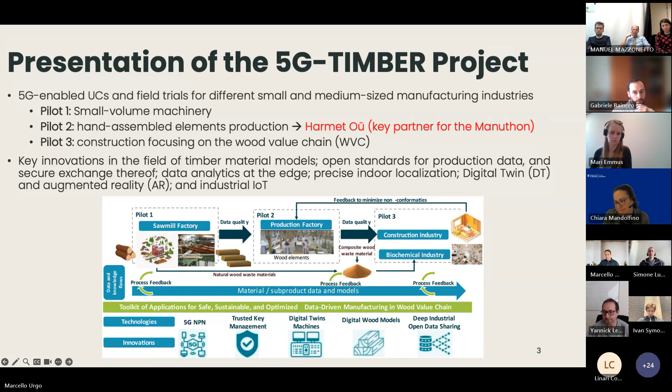Good day, everybody. My name is Mari, and I'm a Harmet project manager. Harmet produces timber-based modular buildings since 1997, and we offer complete solutions from design to production of the modules to the assembly of these modules on site.

But before I tell you a bit about Harmet, I will share a bit of insight. What is modular construction? As you know, traditionally in the construction industry, buildings are built on site. But in modular construction, the prefabricated modules are produced in a controlled factory environment, and these modules are then assembled on site. These modules have either metal, timber, or hybrid structure.

In our production, the first stage is the production of 2D elements, out of which these are put together into the 3D module, which you can see in the upper picture. The windows and doors are also installed in the factory.

During the same time when the modules are being produced, the site works are also being done. When the modules come from the factory, they're transported to the site, and on site these modules are assembled next to each other and on top of each other. After that, the connections between the modules are made, and additionally the HVAC and electrical systems are assembled. Then the building is ready.

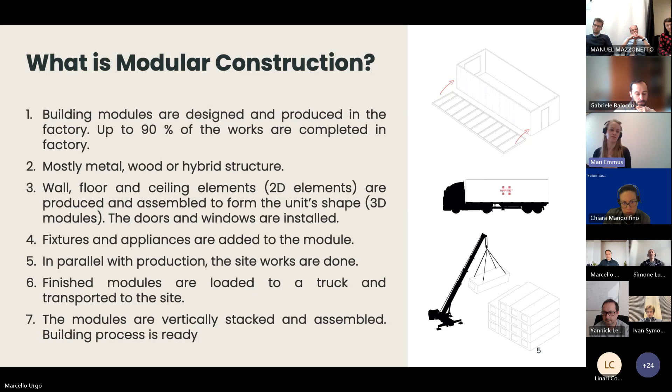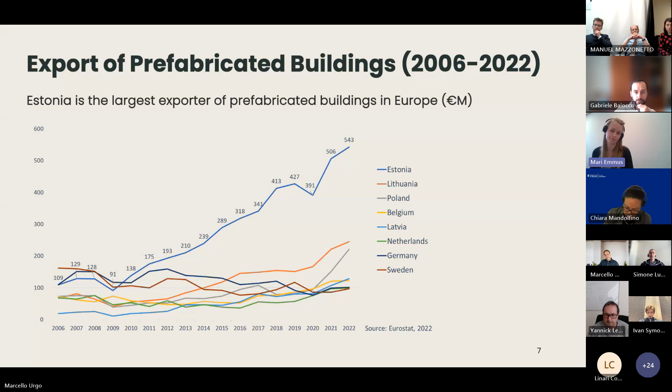What you perhaps do not know is that Estonia is the largest exporter of prefabricated buildings in the whole of Europe. Next slide, please. So a bit about Harmet.

We're the largest producer of modular timber buildings in Estonia. Our monthly production capacity is between 600 and 800 3D modules, depending on the product we are producing.

The first are the site huts, which are quite simple products used on construction sites. We are capable of producing around 800 of these modules per month.

The second group are the semi-permanent modules, which are used to assemble schools, kindergartens, offices, and accommodation for workers. The third group are the permanent buildings, which are, let's say, like regular buildings - apartment houses, student houses, and retirement homes.

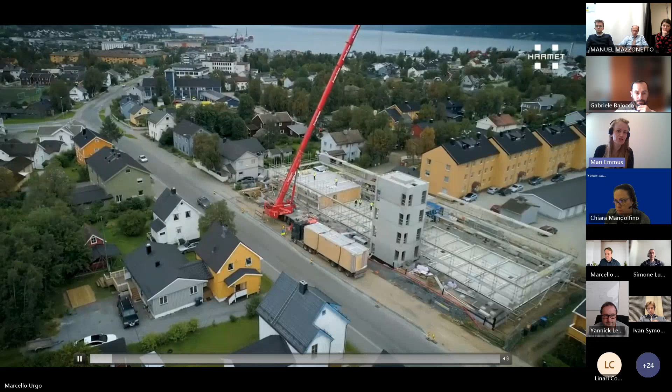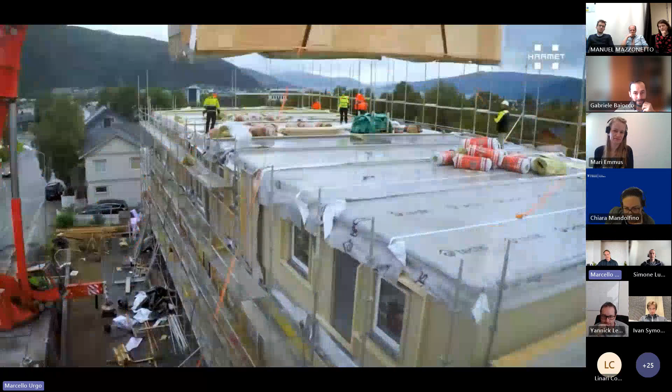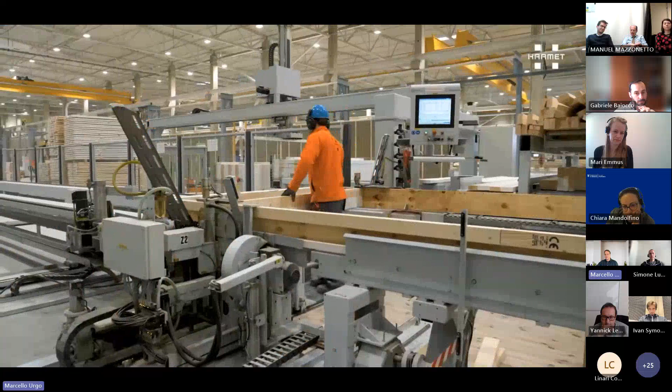Let me try. Building for your dreams. Harmet values your time by offering you the opportunity to plan and build faster and more efficiently than ever before. Harmet offers our clients complete solutions, from design to the assembly of our buildings. Our rapidly evolving company began producing prefabricated modular buildings in 1997.

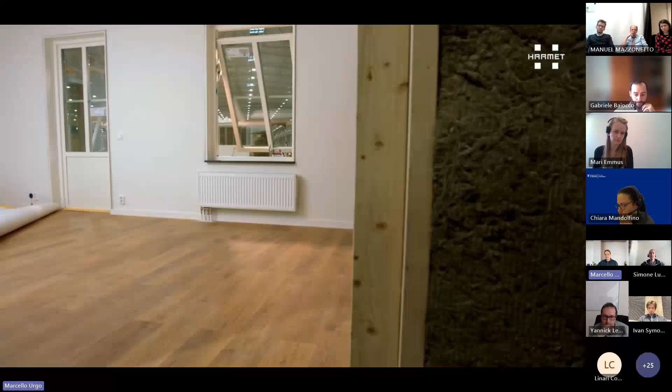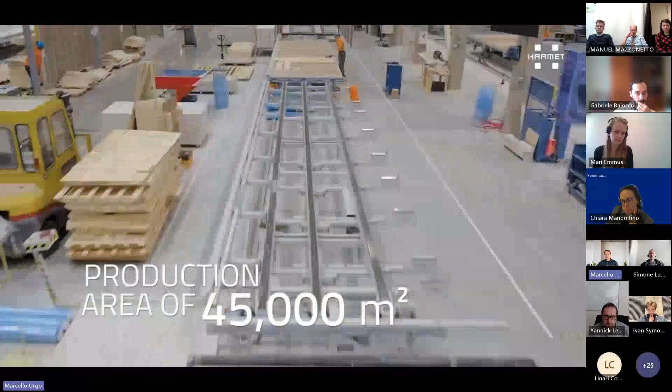Our product range includes various modular houses, building elements, and modular on-site facilities. With a team of over 600 personnel, Harmet operates in 4 factories with a total production area of 45,000 square meters. The total annual building capacity is approximately 200,000 square meters.

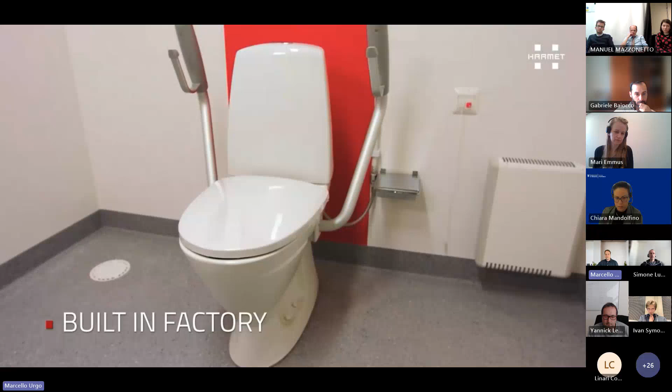We provide prefabricated modules. Around 90% of the entire building structure and interior is manufactured in our factory, which offers the most optimal and safest conditions for construction. Harmet's primary market is Scandinavia, and more than 95% of our production is sold to Scandinavian countries.

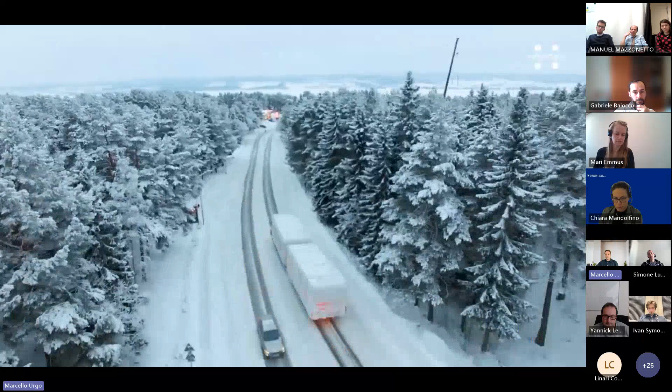Close to 70% of our production is delivered to the Swedish market, with our primary customers being Kramo and BoKlok, IKEA's and Skanska's joint venture. Harmet employs more than 25 engineers.

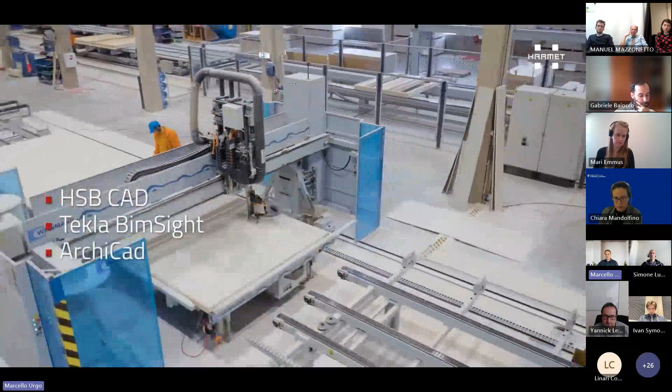We use BIM technology, available software including HSB CAD, Tekla BIMsight, ArchiCAD, MagiCAD, and AutoCAD architecture. We carry out building elements, technical drawings, water sewage, heating and ventilation system design, also electrical system design models, and project management of the design.

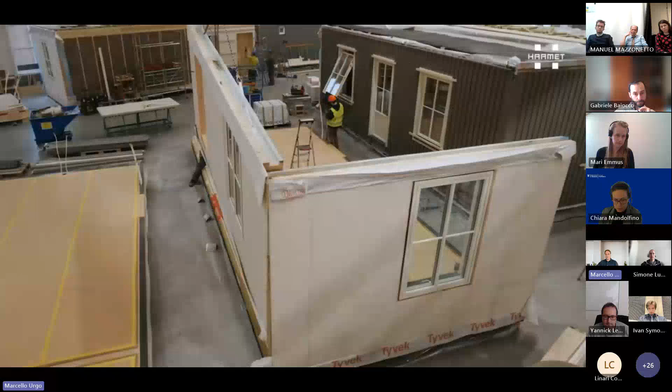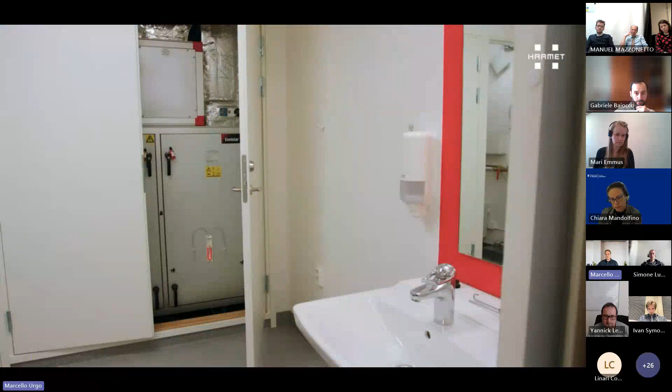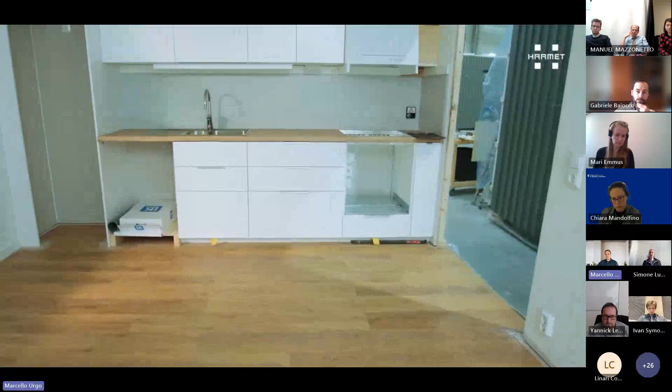Our products come with all doors and windows pre-installed, with all interior finishing and most of the exterior finishing already completed, with complete power, water and sewage systems, with all sanitary and bathroom appliances already fitted, with a pre-installed ventilation system, with pre-installed kitchen cabinets and appliances. We can also install all furnishings, and all modules undergo quality control before leaving the factory.

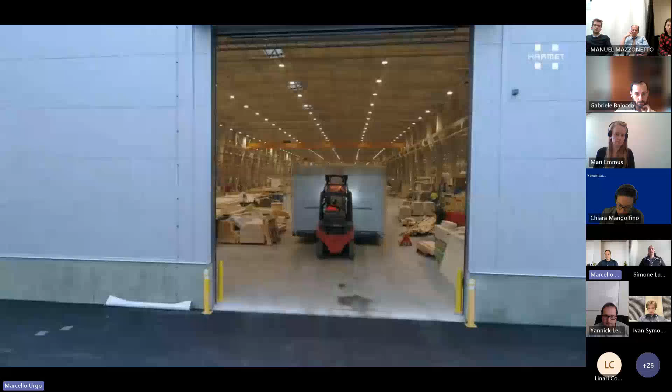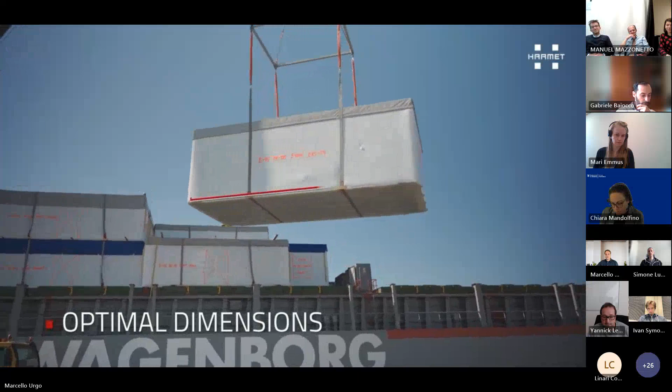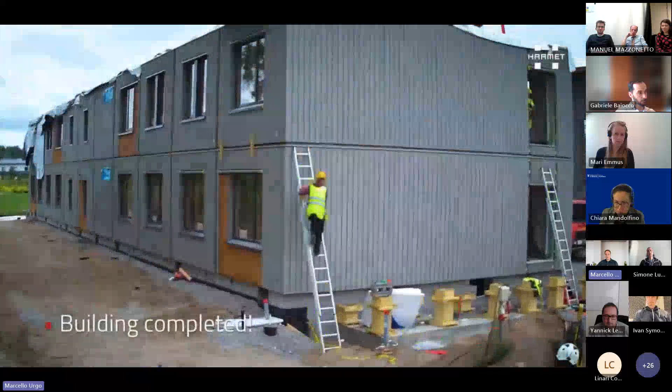Our products feature high-quality construction materials, which ensure a long service life and reduce future maintenance costs. Harmet's products come with up to a 5-year warranty.

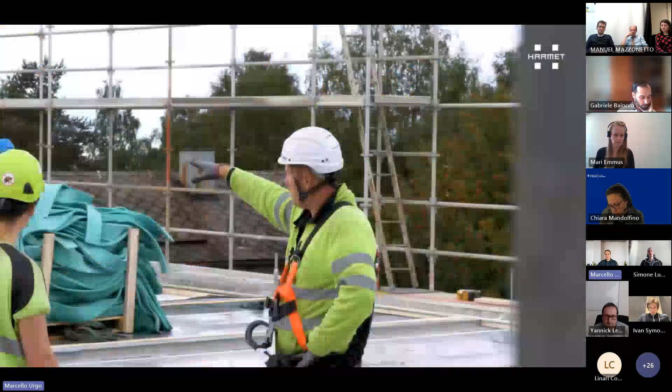In March 2010, Harmet acquired a Pan-European Quality Certificate, ETA 10/0030, allowing the design and assembly of wooden houses all over Europe.

Harmet is also environmentally active by planting numerous new trees every year, helping to renew and regenerate forest and woodland areas. In 2017, Harmet opened a brand new factory at Kumna, Estonia.

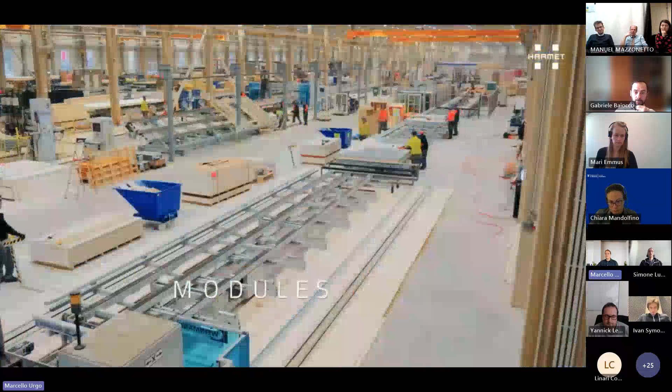With 23,000 square meters of production area, it will provide an output of 350 modules per month. Modern technology lowers production costs and raises volume levels, which is a great step towards satisfying our most demanding customers.

With Harmet's wide product range, from portable on-site facilities to modular building elements and modular houses, Harmet offers you the opportunity to plan and construct for your wildest dreams. In no time.

So, Mari, if you don't have anything to add, I will continue. No, thank you, Marcello. So, thank you. I will take the stage now. I'm presenting in English. Well, I'm Italian, so in case any question arises, both me and Simone, we can speak Italian, so we can support in any case. Thank you to the colleagues, and thank you, Mari, for your availability to be a use case for this challenge. I will briefly present the motivation and a description of the challenge we are presenting to you.

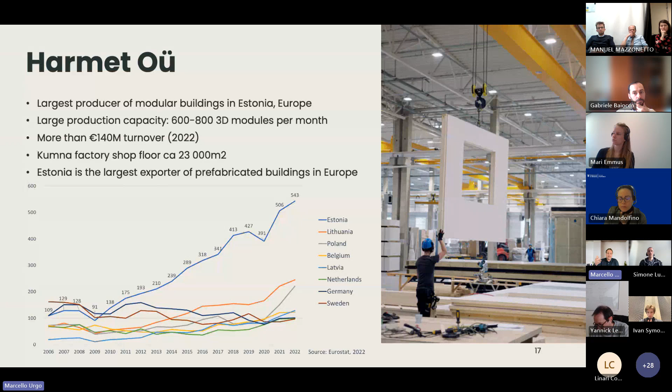This has a clear impact on the way those modules are produced and the factory that has to take care of this. The main industrial motivation we'll address here is that Harmet provides a wide range of products—many different kinds of modules used in different ways. There is a wide range of typologies, but they also allow customization, providing furniture, electrical and water installations, and specific configurations for the customer.

Each module could be different from the others, and this provides extreme complexity in the production system, and consequently risk for errors, because most activities are executed manually. Also, if you are producing different products in the factory that change from day to day, the logistics of material, people, and transporters moving inside the factory can be complicated, which is a possible source of dangerous situations on the shop floor, since you're handling heavy components in different places. This is a strong motivation to use digital technologies to support safety.

How can 5G and digital technologies in general help? There are two main directions we are pursuing. The first is bringing to the human operator the best information they need—instructions, drawings, data—so that on the shop floor, while assembling the product, they can access this information easily. Extended reality, or XR, is one of the technologies we're addressing in the project, since 5G enables this even more on shop floors.

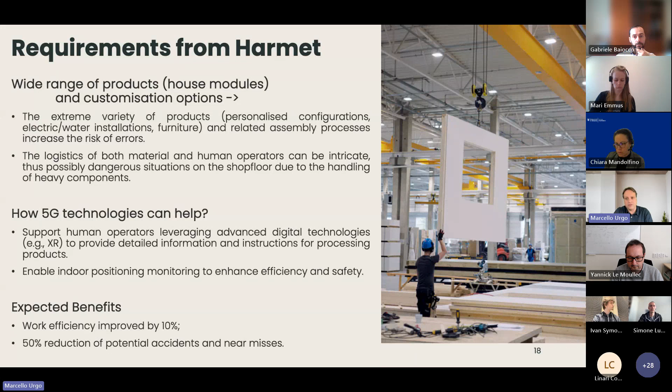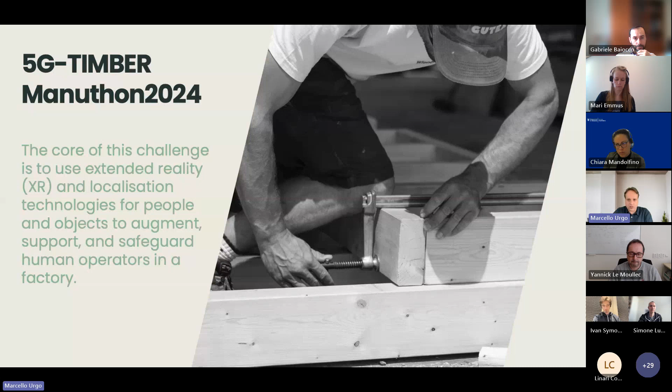So the core of the challenge is using extended reality to support people and check their position against dangerous situations in the factory, specifically the handling of materials. The idea is bridging the gap between the real factory and the digital factory that contains all the needed information and monitoring of what is happening, to enhance productivity and mitigate the associated risk.

You will take advantage of the technologies and tools we are developing in the project. You'll have an XR technology environment ready to use for prototyping, and you can also use technologies leveraging XR for precise localization of objects. So the core of the challenge is to use extended reality and localization technology, especially QR codes that can be seen by the XR devices, to identify objects and estimate distance. The idea is to support the human operator while they are assembling those modules.

The proposed solution is expected to bridge the gap between the digital and physical world, mitigate risks, and enhance productivity, demonstrating that it can increase productivity and reduce the risk of accidents. What we expect from you is a presentation and documentation of your proposed solution, and possibly a demonstration.

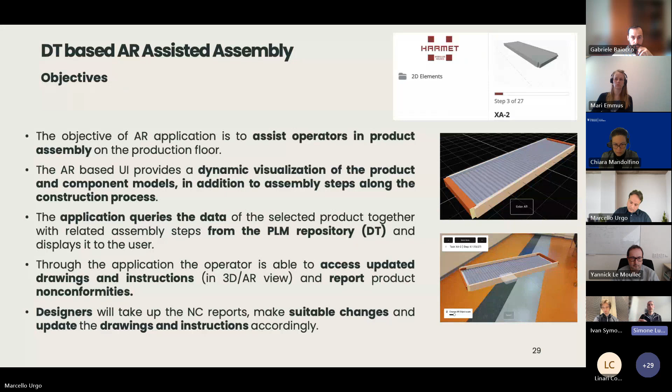So the non-conformities there, which can then be reported and fixed in the design phase and in the 3D models.

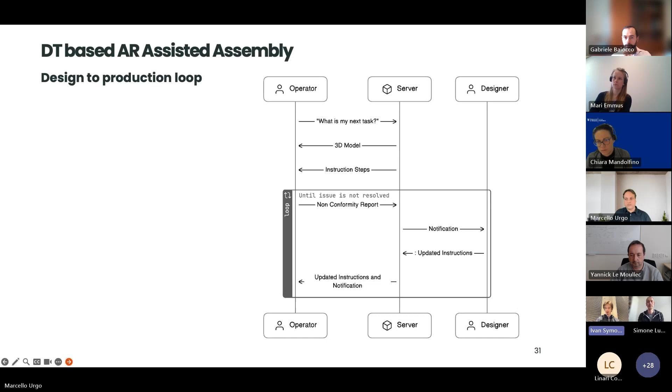So anytime the operator wants to know what would be his or her next steps, he or she can just enter the application, get the relevant step and 3D model, probably from the point where the operator has finished it. In case there are any issues, the person can pinpoint on the real or 3D object visualized in the app the problem, because it's very common that, for example, some model is of improper size or the instruction is not matching with reality. Then it would get a real-time notification to the designer, who will take appropriate steps and update the user with new instructions, new 3D models inside of their personal applications.

Essentially, it is hosting a website with some pages which are immersive, meaning that you can run the XR scene from there, navigate there with your tablet, then run XR mode, and walk around and see what is there. Multiple operators, regardless of the device manufacturer which they are using, whether it's a tablet or mobile phone, can connect to the website hosted inside of the network and experience the functionality which we provided for simplifying their job.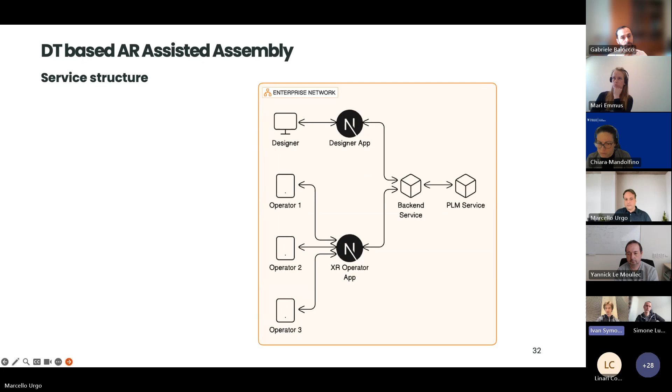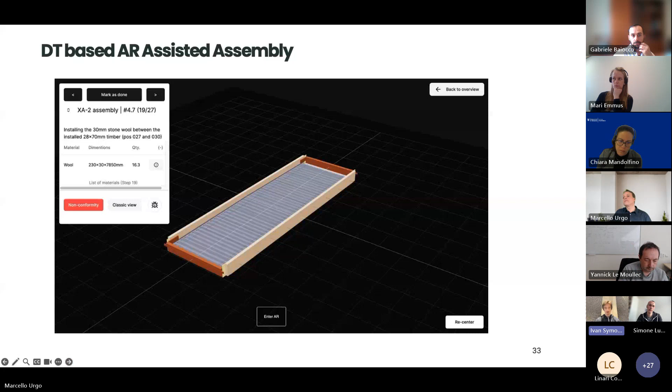Here you can see a screenshot of our operator's production step, where you can see the expected result. This tool also allows us to use simple 3D visualizations, because sometimes it's easier to understand, but as soon as you need to get a closer look, you can go to AR. You can see aside there is a set of materials and tasks which the operator has to do at that point.

Also, like the overall instruction, what the person's task would be for the day.

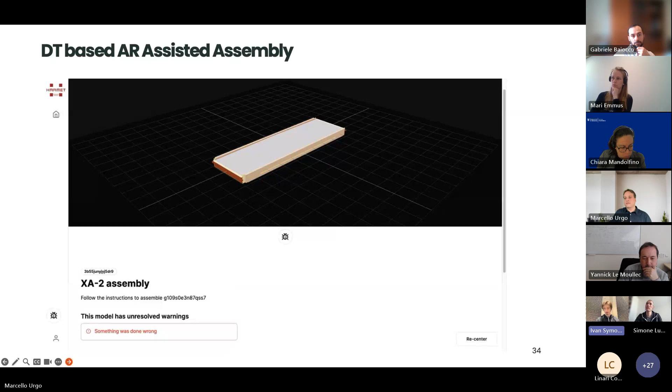Okay, I believe that's already explained in the previous diagram. I thought the screenshot with the XR was missing, but I hope participants can trust us that all the views which we showed before can also be run in AR. We even made some tests, and the person could walk around with the tablet and see all these parts placed inside of the local floor, as if they are real components, but they can also look through it in case a person wants to walk around or see something.

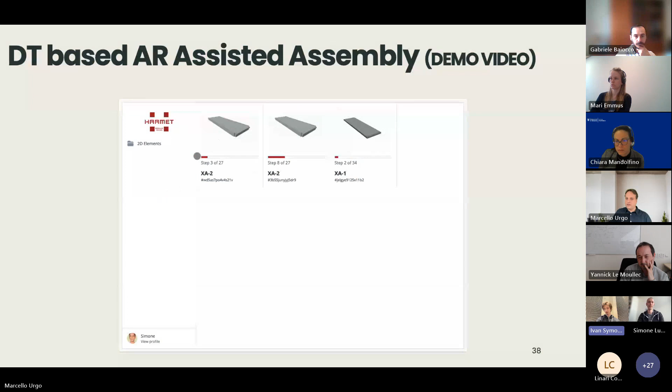This is basically the flow of how the logic works. It's a bit different from classical XR apps where you have a standalone application on your device, because in that case you would need to build it every time, and the development would take a lot of time. So this is the way we propose to use the solution. Basically, utilizing web technologies, or making the thing as a web application, allows us to make rapid development, meaning that you just need to save the new version and it will be automatically updated in all the devices listening to the website.

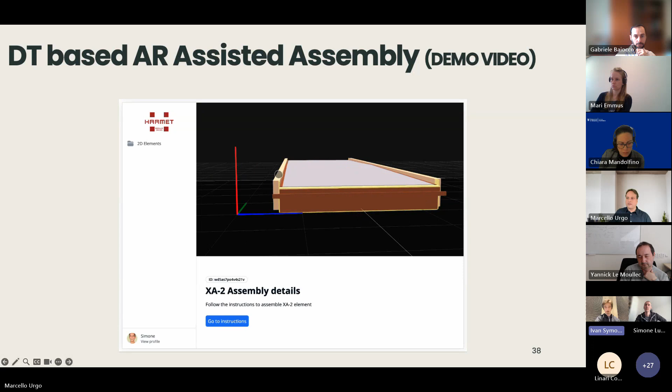Here you can see the interactive demo. It's probably not the latest version, but that's the application, how it was working. Here you can see that we can explore the model in 3D. You can navigate over the steps from here, so you can see what would be the task for this current step, what materials are used.

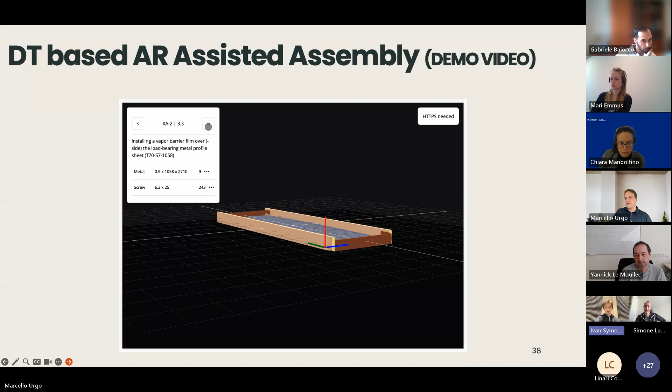Typically on the production floor, people are doing tasks, and then they ask what to do next. Also here there is a report form for non-conformities. It's better to use a classical form sometimes, as it was done at this step, but it's sometimes acceptable if user testing shows that it's more intuitive for a user.

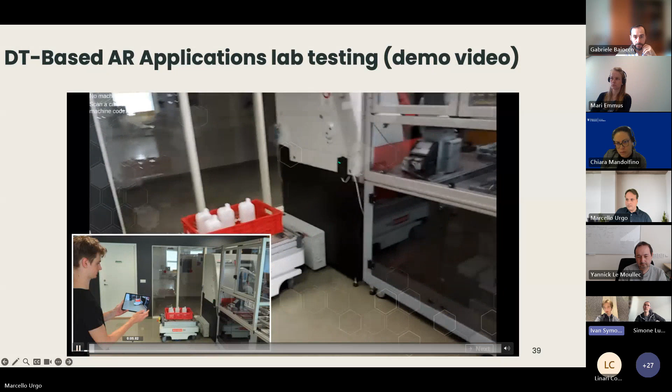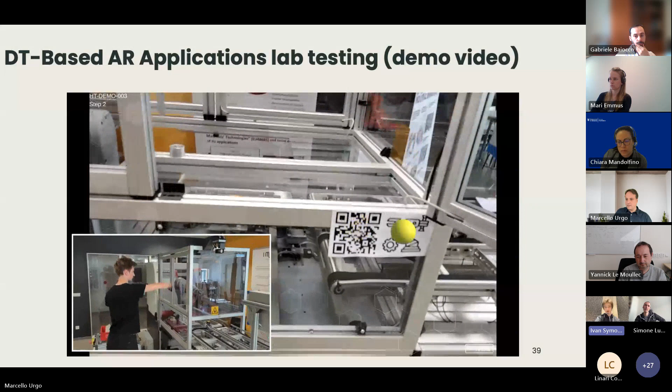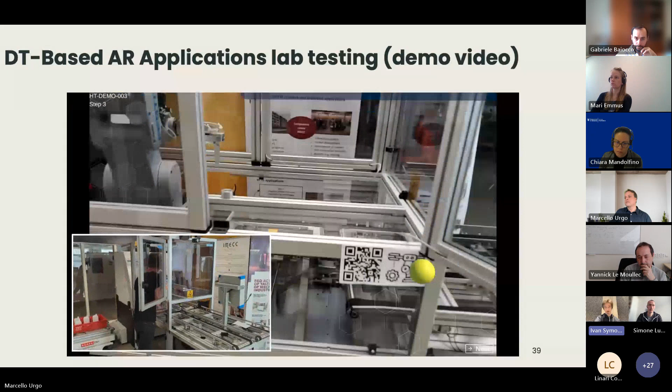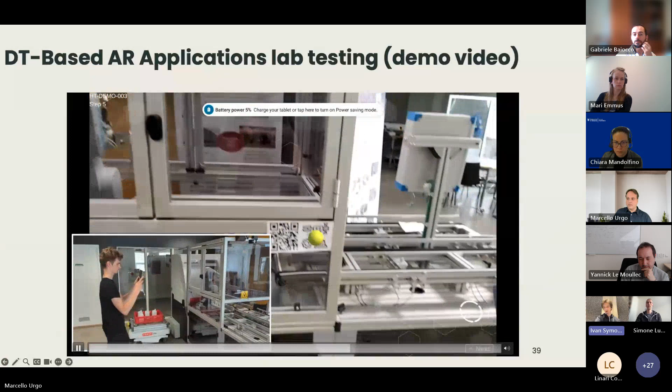The second use case, which we are also developing under the 5G project but for a slightly different company, is a maintenance assistance for operators, basically, but it's for rather technicians. This tool allows you to place 3D cards on top of real objects, basically in real time. So the tablet can see the markers, especially the frame of the video feed from its frontal camera, and position the card with instructions on top of it.

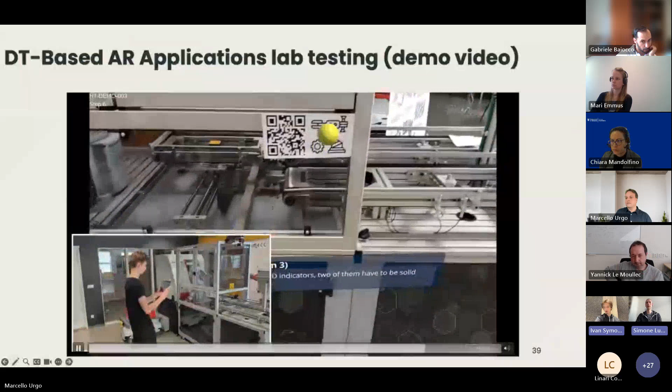So this might be another use case which you might want to use in the hackathon, or integrate the same functionality. It was not done, as you can see in Harmet's use case, because in a dusty and not constantly lit environment it causes some implications, but maybe in the near future it will be there as well.

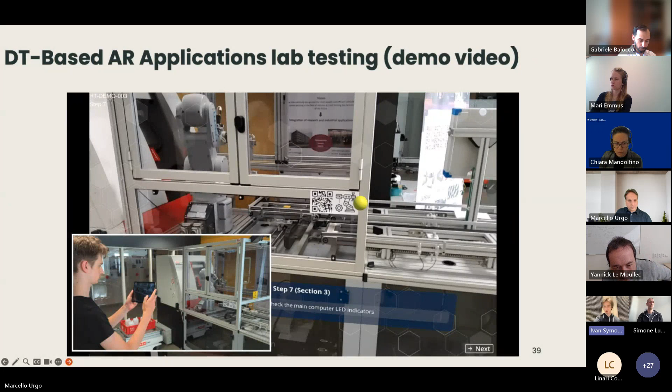So that was, I think, all from our side. If you have any questions, we would share with you, or with the organizers, and they could share with you the guide to these technologies. These tools might cause some complexities because they require coding skills, but I've created a detailed guide with the motivations, which we typically give as our internal resource, but we are willing to share it with you. If you have any questions, you can contact me with my working email, which I will provide. Thank you.

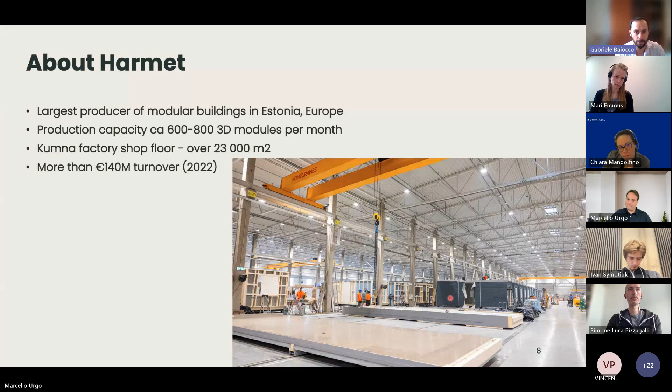I would have another question: how customizable are the modules? As a client, can I come to you and ask for round modules? How deep can I go with the customization of your product?

And the transportation. In that sense, the limit is also connected to the size of the door, but to be honest, transport is an even bigger issue.

Because if we're transporting ready-made 3D modules, having an extra wide or extra long module to transport on a road depends on the road, etc.

But of course, we don't produce round modules, and we also have height limits. Just to give an example, one of the recent products we did for one of our clients...

...is quite long, I think it's like 16 meters long, and it has some other challenges. So the engineering department has to say what is doable and what is not.